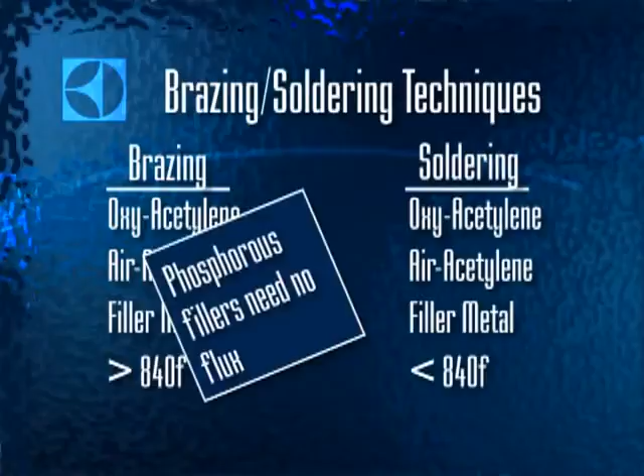The filler metals used at these temperatures on copper contain phosphorus and promote good capillary action, so brazing copper to copper can be done without using flux.

The trick to creating a perfect braze or soldered joint is in evenly heating the tubing and the connection to the correct temperature without overheating. Overheating the metal causes many problems.

Capillary attraction is a fundamental principle in brazing and soldering and is the basis for sound joints. When a joint is prepared and heated correctly, the filler metal will melt when it contacts the base metal, and capillary attraction will draw it into the narrow space between the pieces. It will actually fuse into the base metal to form a metallurgical bond, or third alloy.

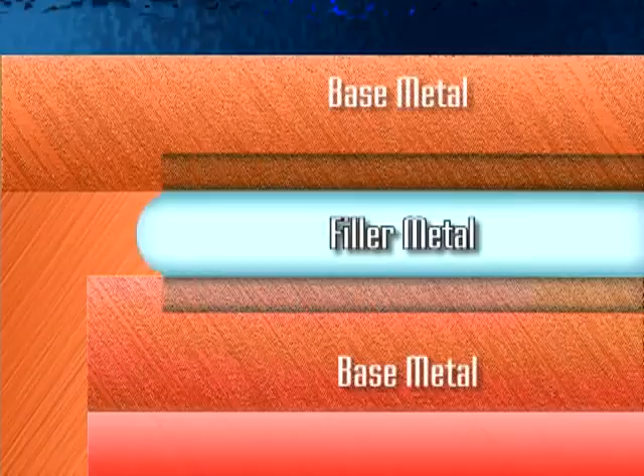Capillary attraction is a delicate force that depends on wetting to pave the way into the joint. Wetting is how the filler metal moves through the joint. A molten drop of filler metal takes the shape of a drop because the molecules within the alloy are attracted to each other, but they have a stronger attraction to the base metals being joined.

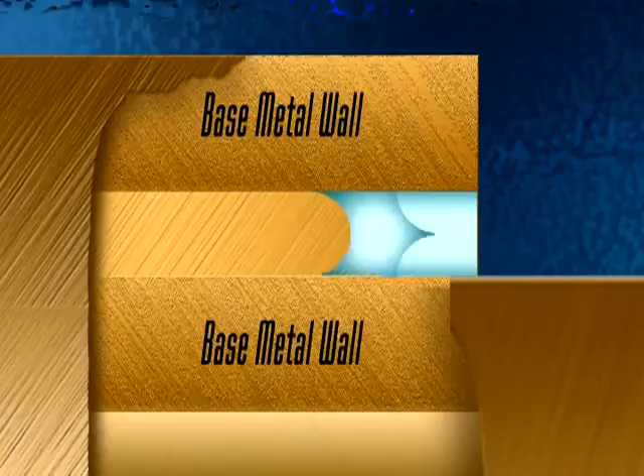So, as the filler metal enters a joint, the natural curve is broken as the alloy is first attracted to one wall of the base metal. This is called wetting. The opposite wall of the base metal is then wet by the filler metal, and the filler metal reforms its natural curve. As long as nothing disrupts this process, it continues as the filler metal travels the length of the joint.

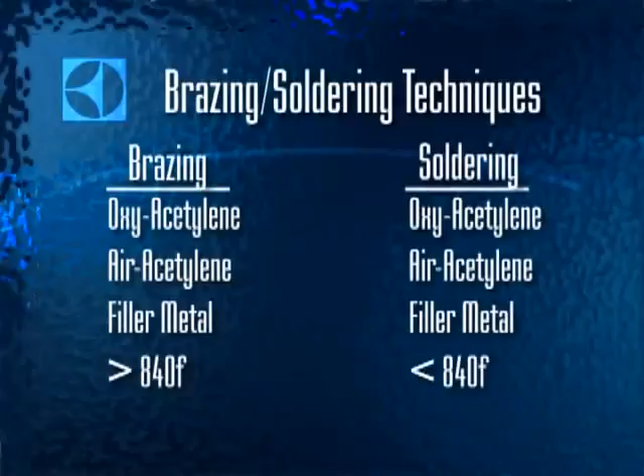But if the metals are not properly cleaned or are overheated, wetting may not occur and the capillary attraction is lost. Most servicers prefer brazing because it's quicker and doesn't require using flux.

Brazing is quicker because the flame is hotter, so it's important when brazing to be careful not to overheat the joint. Brazing refrigeration tubing is best done with a number 2 tip.

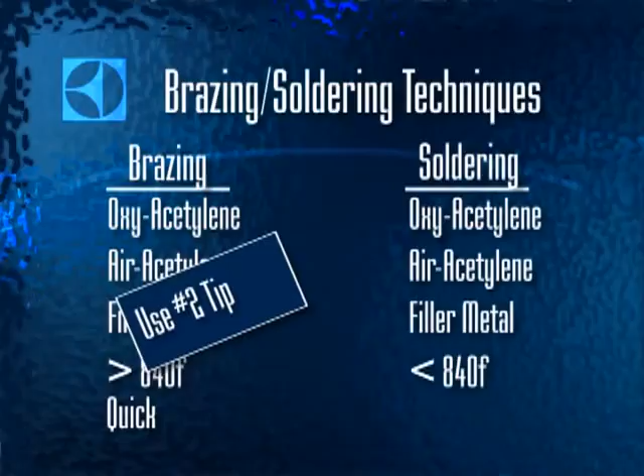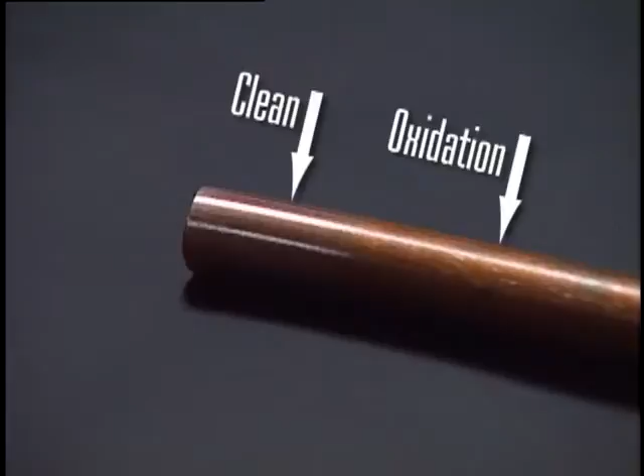Begin by cleaning the pieces to be brazed. Wipe oil, grease, or dirt from the tube and fitting, then use an emery cloth, tube cleaner, or cleaning pad such as Scotch-Brite. Cleaning is critical because it removes oxides that would disrupt wetting of the surface by the filler metal.

Flame adjustment is always important. When using oxyacetylene, a neutral flame is best for copper. A neutral flame is produced when the ratio of oxygen and acetylene is approximately 1:1.

When a torch is lit, the initial flame contains an excess of acetylene. This flame is called a carburizing flame because it deposits carbon on the workpiece. Carbon on the workpiece would inhibit wetting.

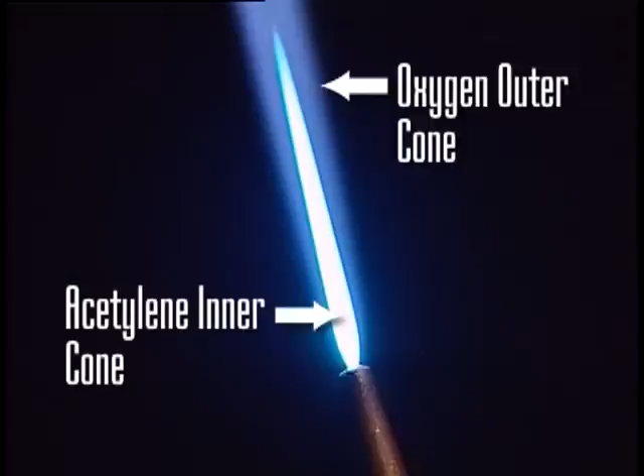To produce a neutral flame, add oxygen until the inner feather all but disappears. Adding too much oxygen, however, will produce an oxidizing flame, characterized by a sharp inner cone. An oxidizing flame increases surface oxides that also prohibit wetting. A neutral flame is needed because it imparts no chemical reaction to the base metals.

Use a filler metal that contains phosphorus. Phosphorus is a deoxidizer and makes the alloy usable without flux on clean copper.

Proper heating is critical to making good joints. The majority of leaks can be traced to improper heating. The reason is simple: joint strength and soundness depend on drawing the filler metal into the capillary space.

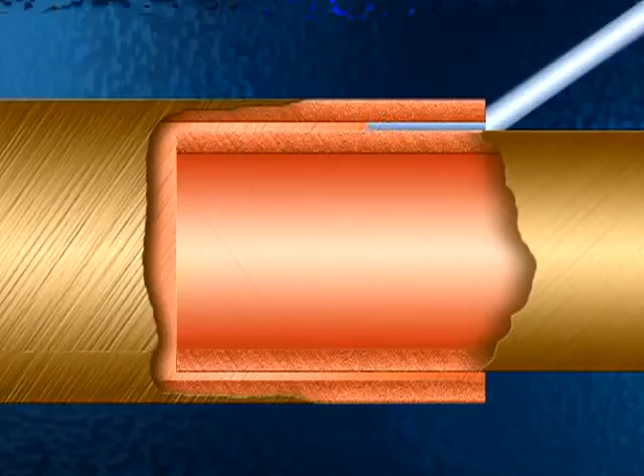Filler metal will not flow into the joint unless both parts are at brazing temperature. Improper heating ruins capillary action, so that filler metal just piles up around the outside of the joint. Over a period of time, system vibration will cause a leak to develop.

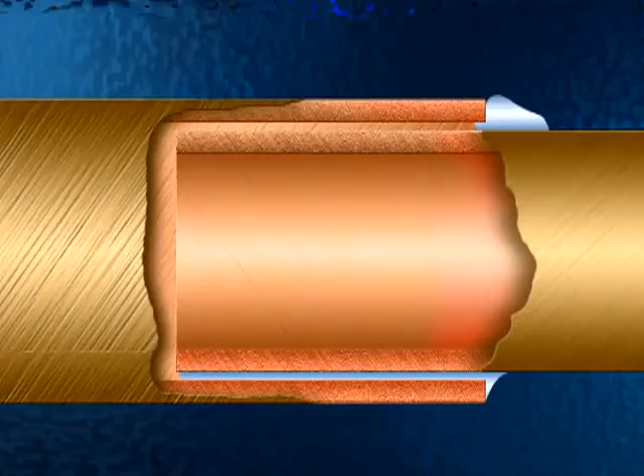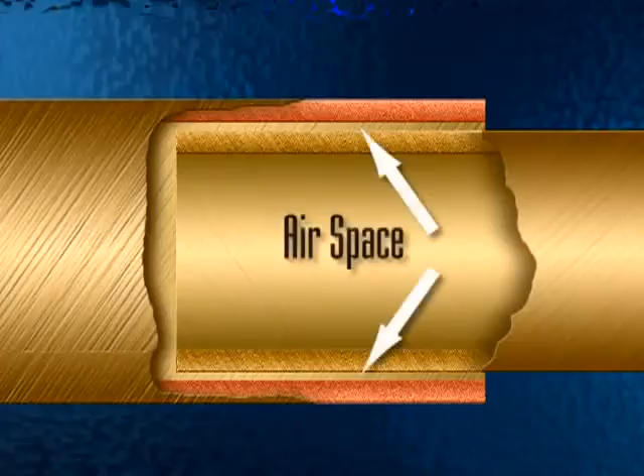How do you evenly heat both parts to brazing temperature? If you heat only the fitting, then you must conduct heat through an airspace, and air is a poor heat conductor.

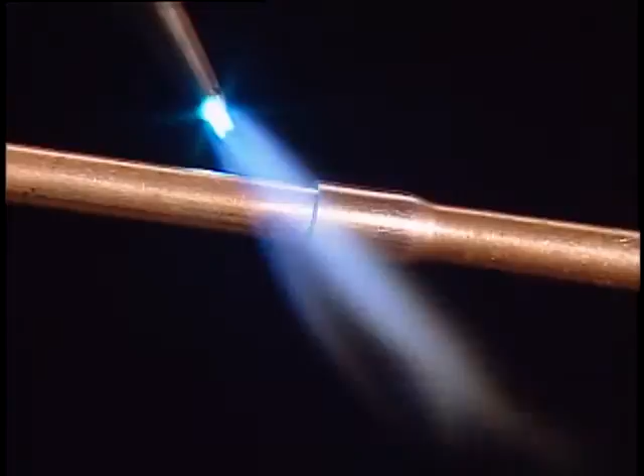If you instead first heat the tube, you take advantage of copper's excellent conductivity and draw heat inside the joint. Then apply heat to the fitting, keeping the torch in constant motion to adequately heat both the tube and the fitting. But don't overheat. Overheating causes a variety of problems.

First, it oxidizes the base metals, and the oxidation interferes with the flow of filler metal into the joint. Second, oxides inside the joint will flake off and potentially block the cap tube. Only a nitrogen purge will have enough pressure to loosen and eliminate all of those oxides.

Once the parts have reached brazing temperature, apply filler metal, and always apply it to the opposite side of the joint from the flame. The base metals will melt the filler metal and the capillary action will draw it into the joint. Never use the flame to melt the filler.

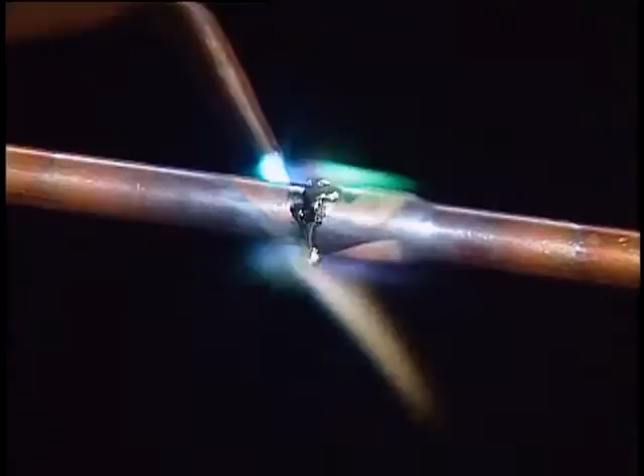Filler metals will start melting below brazing temperature, but will not become fluid until it reaches brazing temperature. So if the base metal is too cool, the filler metal will stick but not penetrate.

As the filler melts, watch for it to be drawn into the joints. That's a good confirmation that you have reached brazing temperature. Move the flame around the coupling to draw molten alloy into the capillary. If necessary, add filler metal to other points to fill the joint.

Capillary action even works on a vertical joint. First, heat the tube, then heat the fitting. Keep the torch in motion to evenly heat both pieces. Then apply the filler metal. For joints in this position, direct the flame away from the joint to draw alloy into the joint.

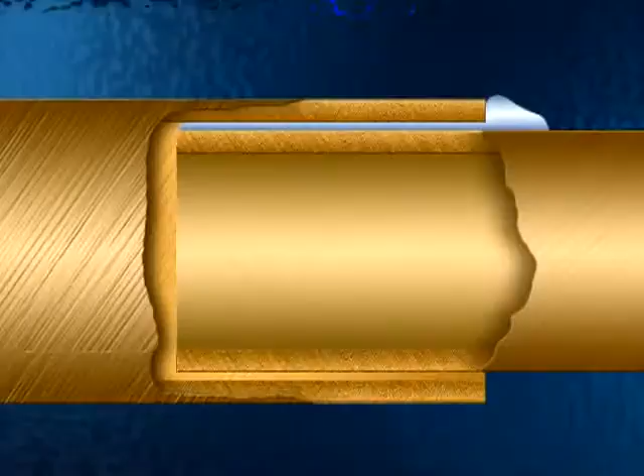It's important to understand that a large buildup or fillet around the outside of the joint is not needed, nor is it an indicator of a good joint. It's usually just a waste of material. A small concave fillet is preferable, unless an additional cap is necessary to promote moisture runoff. This can be accomplished by reducing the heat and adding a fillet.

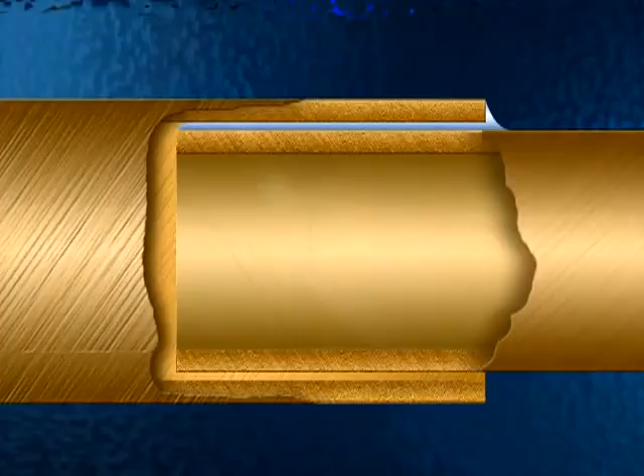Anytime you need to protect part of the tubing from the heat source, use a cold shield gel that is designed specifically for that purpose. Never wrap tubing with a wet rag on a 134A system. The heat will draw moisture into the tubing, contaminating the system.

When brazing steel or brass, or brazing these metals to copper, you must use the appropriate filler metal for those base metals. Never use a phosphorus-bearing alloy to braze steel. The joint will be brittle. Also, take care when brazing copper-coated steel. If in doubt, use a silver brazing alloy.

You'll need to use a chemical flux with these base metals to dissolve oxides and prevent them from reforming during heating. Flux goes through changes during heating, and these changes are a visual clue to when parts are at brazing temperature. At 212 degrees Fahrenheit, the water boils off.

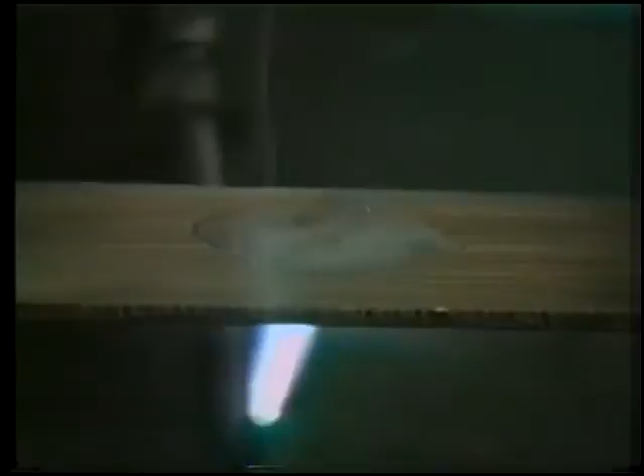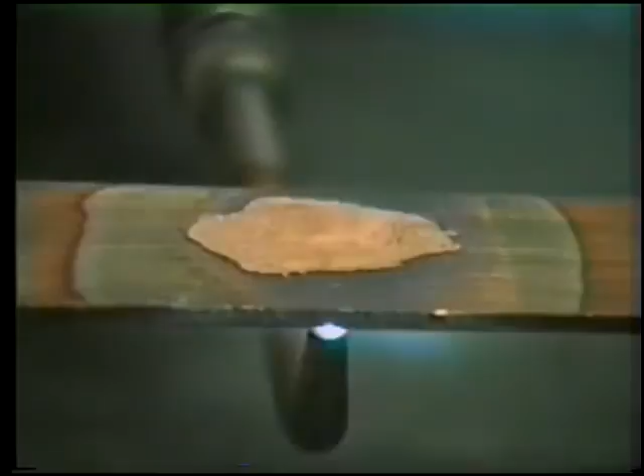At about 600 degrees Fahrenheit, the flux begins to bubble, and at 800 degrees Fahrenheit, it starts to melt and become active. Notice the clear protected area under the flux. At approximately 1100 degrees Fahrenheit, the flux is clear, and we're ready to apply our filler metal.

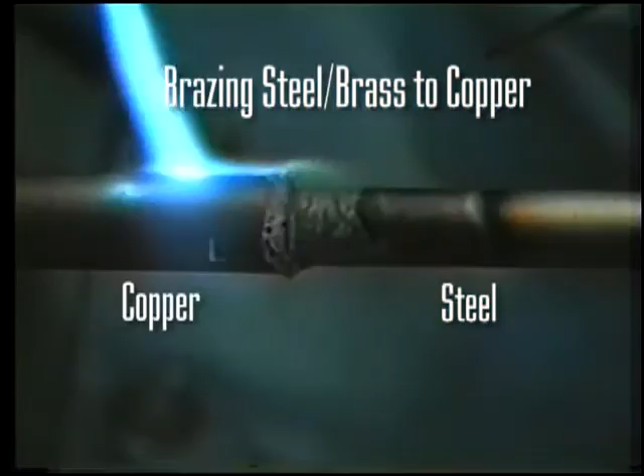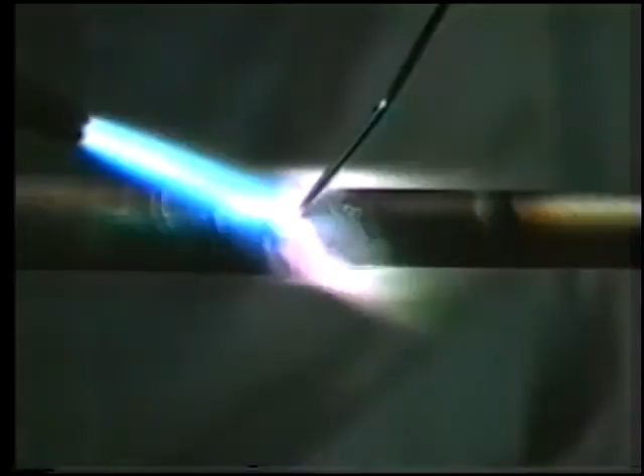When brazing copper to steel, remember, steel does not conduct heat as rapidly as copper. Generally, directing more heat to the copper will bring both pieces up to temperature. Watch the flux to ensure the parts are getting even heat. As in all brazing jobs, as you add filler metal, watch for it to be pulled into the joint.

It's important to remove flux residue from brazed assemblies. After brazing, wipe the joint thoroughly with a wet rag. But in dissimilar metal joints, let the pieces cool prior to cleaning. Otherwise, the different thermal contraction rates might cause the braze to crack.

Refrigeration connections can be easily soldered at lower temperatures. There are many low-temperature fillers that produce joints with excellent strength and ductility and can be used on copper, brass, and steel. The big advantage to soldering is that the low heat prevents scale buildup inside the tube, so a nitrogen purge is unnecessary. Also, you can solder near valves without applying a protective coat of gel.

The filler metals used at these lower temperatures require the use of a separate flux material. Be sure to clean all flux residue from the joints when finished.

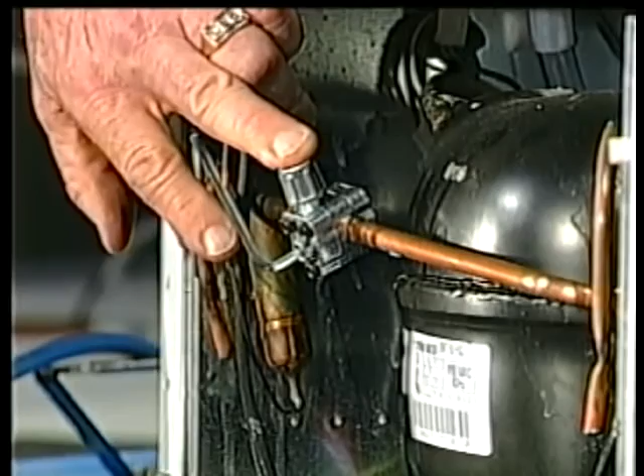You should always stay within federal guidelines when recovering refrigerant from a sealed system. This program does not cover those guidelines, so if unfamiliar with them, please take the time to review them. Recovering refrigerant with a pump requires tapping into only the low-pressure or evaporator side of the system. A variety of approved pumps are available and differ in their use from model to model, so it's a good idea to review the manufacturer's guidelines for the pump you're using.

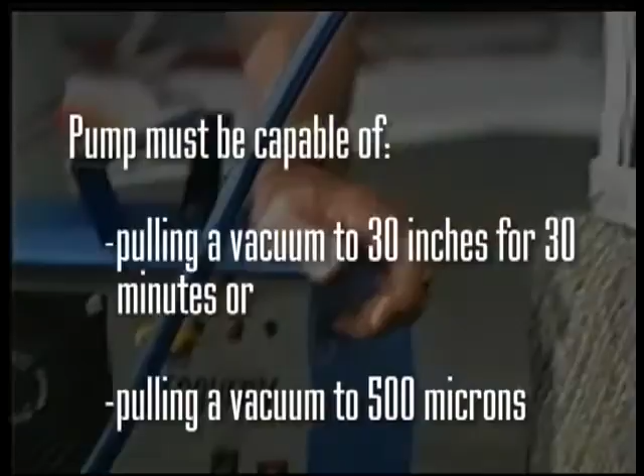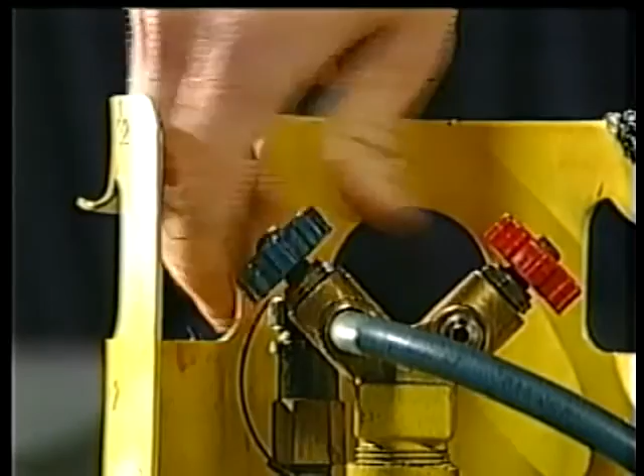After tapping into the system and making all the appropriate connections, open the line tap service valve. Start the pump and then open the valve for the waste tank. Most domestic refrigerators hold only 3 to 7 ounces of refrigerant and take about 5 minutes with a good recovery pump to recover the refrigerant from the system.

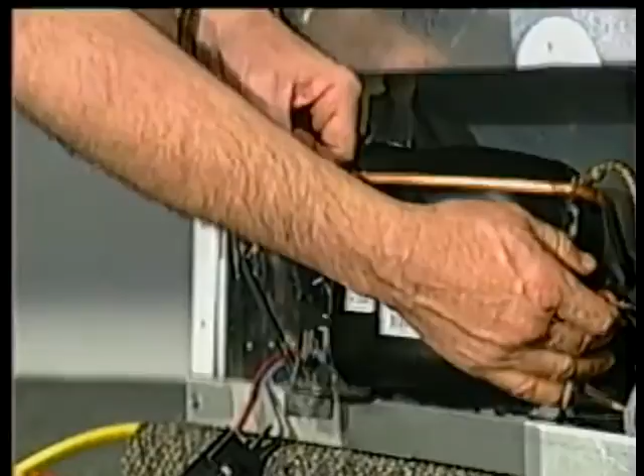If you are using a recovery pump and tank, you'll need to get a sample of oil out of the old compressor to see if the system has been contaminated.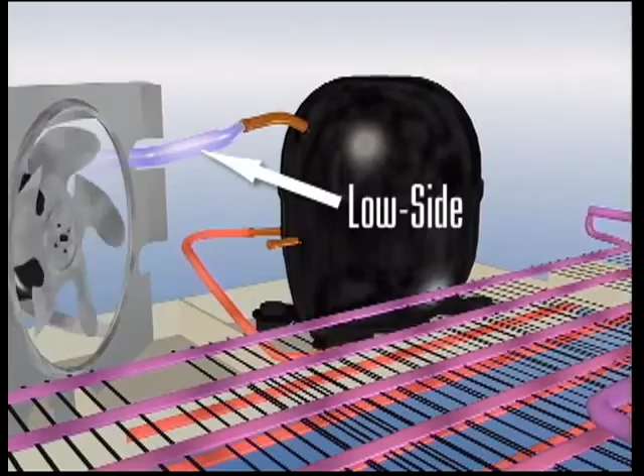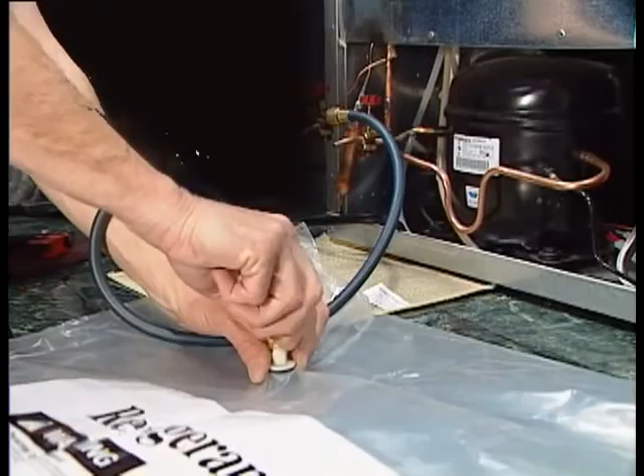The procedure for recovering with just a bag depends upon whether or not the compressor is functioning properly. If the compressor is functioning properly, you'll use it to draw refrigerant from the low side and push it out of the system on the high side. Tap into the high side at the dryer, where the refrigerant should be mostly in liquid form, making for a better recovery. Connect a hose from the service valve to the bag and open the valve.

Start the refrigerator and let the compressor run. It will draw all of the refrigerant from the low side and pump it out the high side.

It's very important to understand that recovery bags are designed to hold a specific amount of refrigerant. The bags are large in volume so that when gravity feeding refrigerant from a system with a dead compressor, the bags will accept all of the refrigerant from the system. While the bags may appear to be able to hold more than their specified capacity, you must never exceed that capacity. Doing so by as little as 2 ounces will usually rupture the bag.

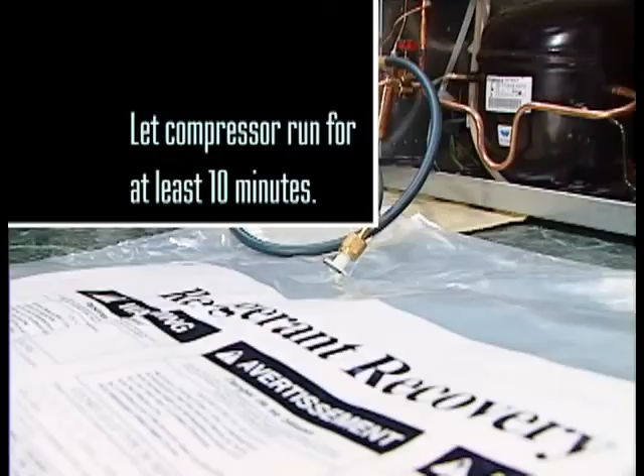Let the compressor run for at least 10 minutes. As refrigerant travels into the bag, there's a certain amount of compressor oil that travels with it. This is a great opportunity to look at that oil and get an idea as to the condition of the system. As oil starts to overheat, it will begin breaking down and turn to a real dark brown color.

Look around the service valve. If you see dark oil instead of clear, then you probably have a contaminated system.

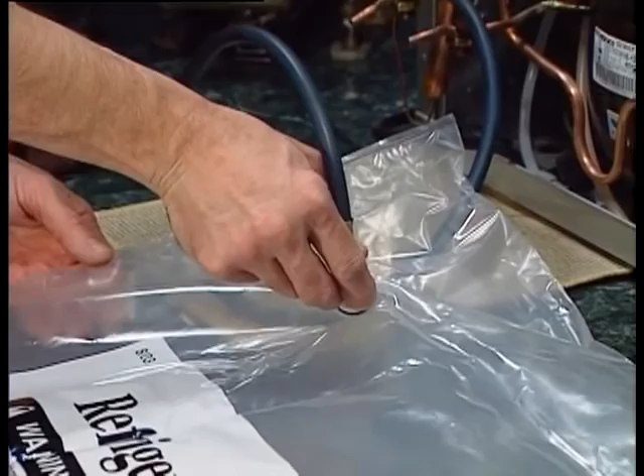This system of recovery works quite well as long as you have a good functioning compressor to work with. If you're using the recovery bag and do not have a functioning compressor, you will have to tap into both sides and let gravity drain the system.

Once you've made the connections, open both service valves and then the manifold. It'll take at least 15 minutes to gravity feed refrigerant out of a system. You should see a slight raising of the bag as the refrigerant goes into it.

Look around the service valve and in the recovery bag. If you see dark oil instead of clear, then you probably have a contaminated system.

When using a recovery bag, you'll still have to pump the contents into a waste tank when you return to the shop. Hook the bag up to the pump just as you would if you were recovering with a pump to a tank. Turn on the pump, then open the valve.